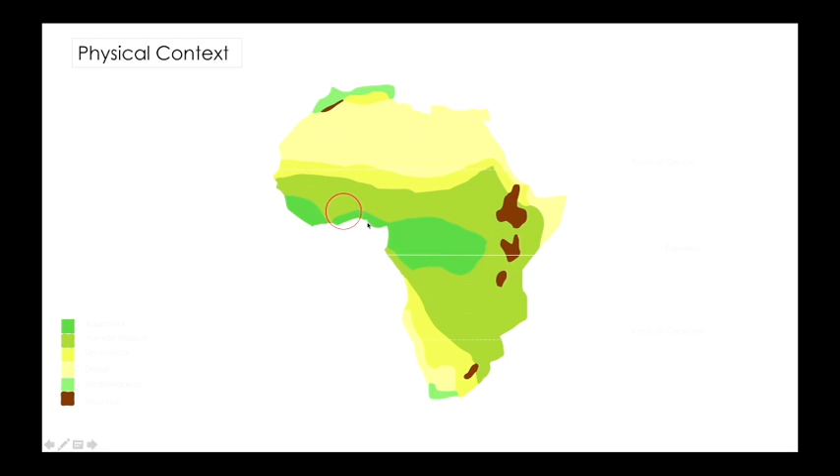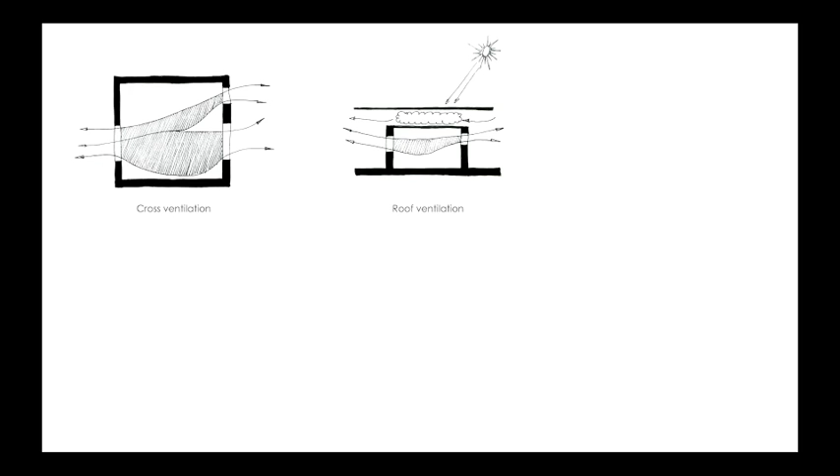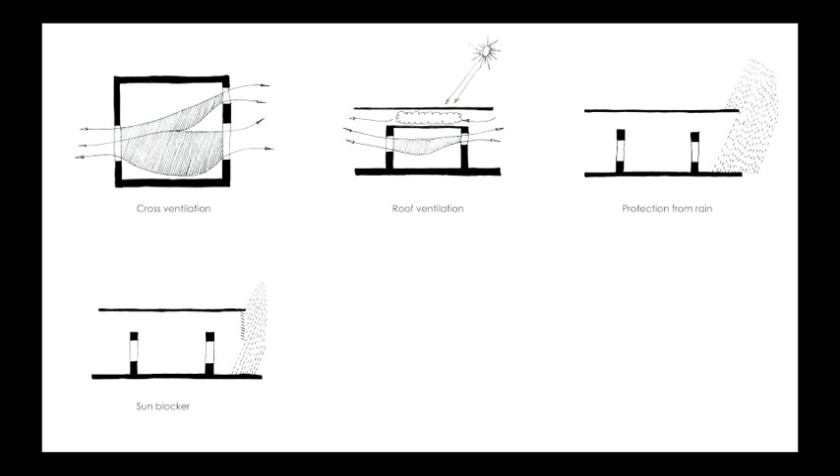And of course, in tropical Africa, we have to rely on certain techniques in order to create good architecture. The first one being cross-ventilation. Second one being the fact that using ventilated roofs can allow us to achieve nice temperatures inside. Another one is how do we protect ourselves from the heavy rains and from the sun. Another one is how do we block the sun from getting in? How do we avoid overheating from sun on glass?

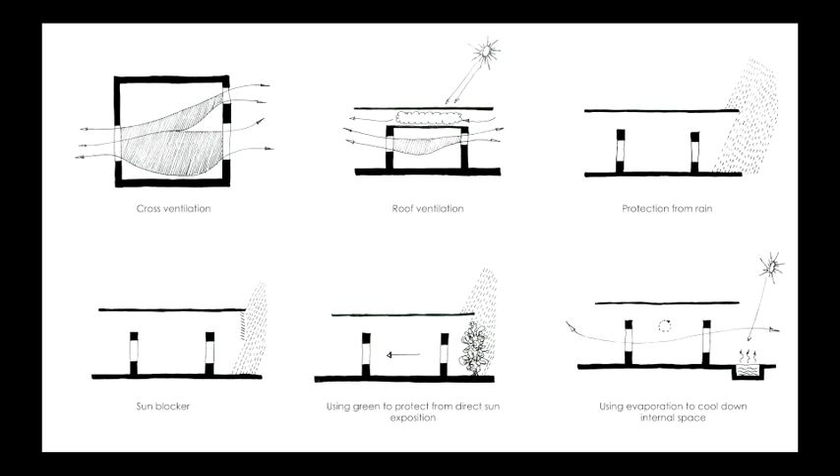Another is also how to use vegetation and greenery to protect ourselves and achieve interesting temperatures inside. And another one is how do we use the sun and bodies of water with evaporation to achieve relatively comfortable temperatures inside. And to demonstrate what I just talked about, I'm going to take you through a house that we recently designed.

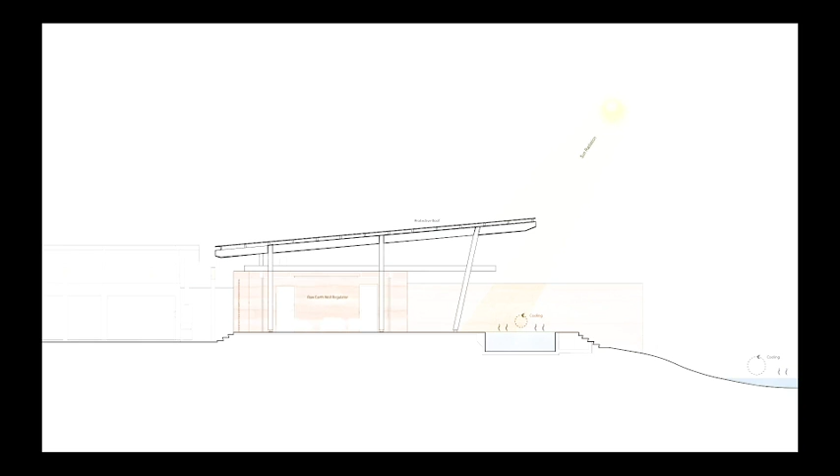Very simple and usual principles in our architecture. We use a one-slope roof to take the water down. We tend to cross-ventilate the roofs so we can achieve a certain comfortable temperature inside. But we also protect ourselves from the sun with big overhangs and use pools to cool down the space, and also use rammed earth in many cases to insulate the internal spaces. And of course, cross-ventilation is something that we use extensively because it's very easy to achieve and creates really comfortable temperatures inside spaces.

So this is the house I'm actually talking about. And you can actually see all these systems, and I think it's much more about systems than about materials. How do they work? And those are systems that have just been borrowed from our traditional architecture.

And of course, in the south, in regions like Abidjan and Accra, you probably have noticed that the traditional architecture is made of what we call bamboo raffia, which is those sticks that are not sealed to the wind. So we achieve cross-ventilation all the time, and we avoid accumulating humidity inside the spaces, which is not the case with modern buildings that are sealed. After 2 or 3 days of a closed room, you come back and you can smell the humidity. So those systems have been for us a guideline in order to design contemporary architecture.

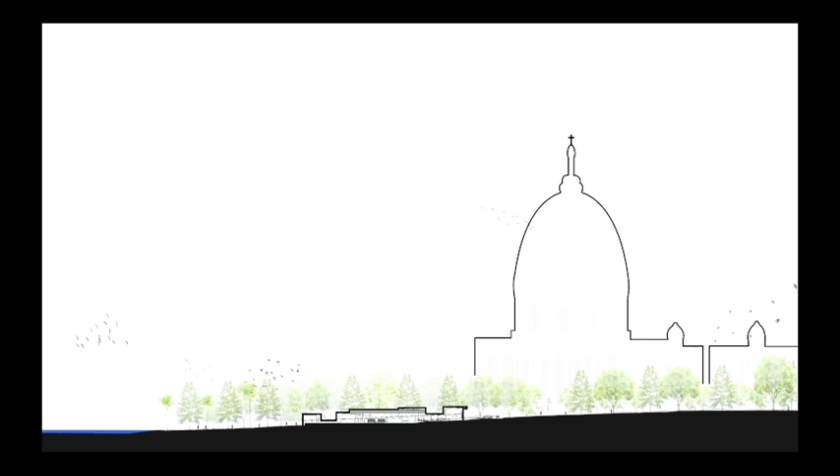And here you can see the scale of the basilica, and this is our intervention for the spirituality center, where you can see all the three scales and trees that are supposed to swallow us later on. So when they approached us, they did not give us a specific site to intervene on, and we decided that maybe the best place to house the center would be in the forest in the back.

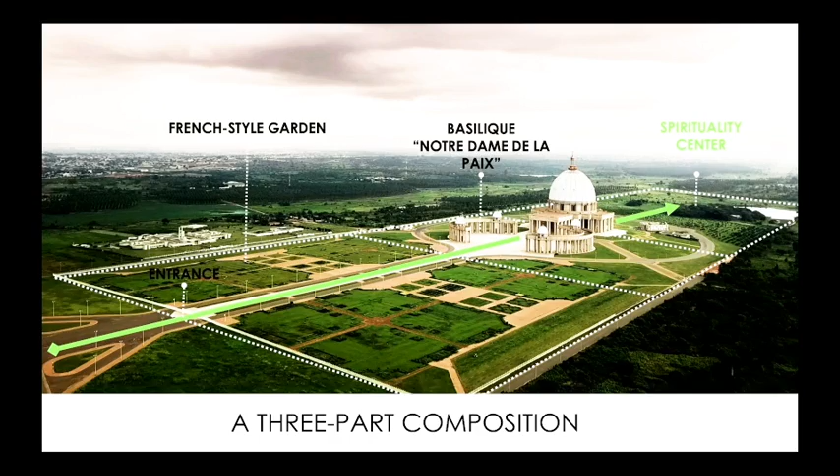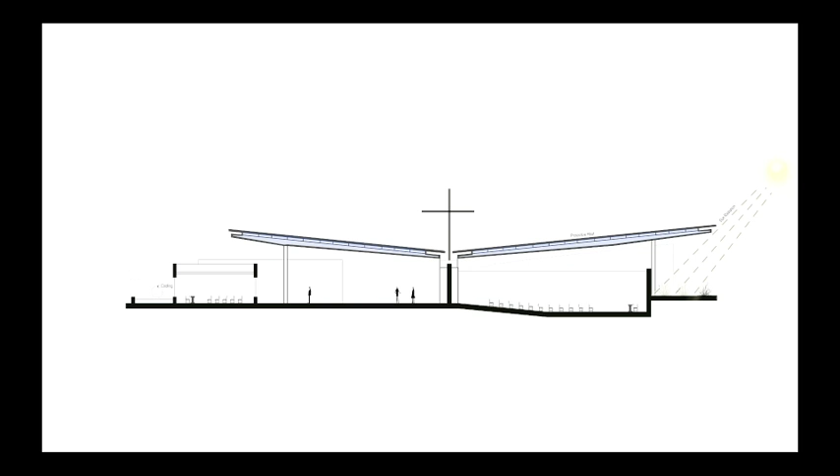And here you can see the similar process as with the other building: the body of water, the sun, the big overhangs, the rammed earth walls and the cross ventilation, roof ventilation, all of that to blend into the architecture of the environment. Here you can see a plan of the entire center.

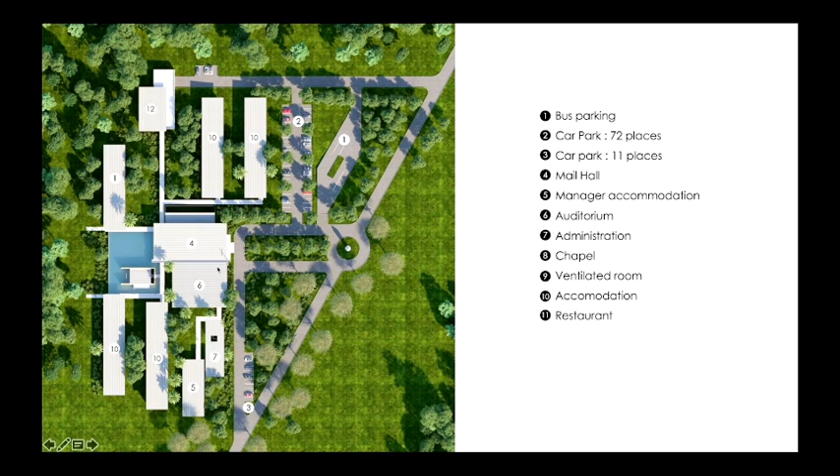Here is the road that comes from the basilica, and we are sort of disappearing within the existing body of trees, with the main space here connecting all the different other spaces, which are made of rooms to be occupied by people who come and retreat. Here, number 8 is a chapel, and the others are support activities like administration and restaurant and what have you. The composition of the layout is through this main space.

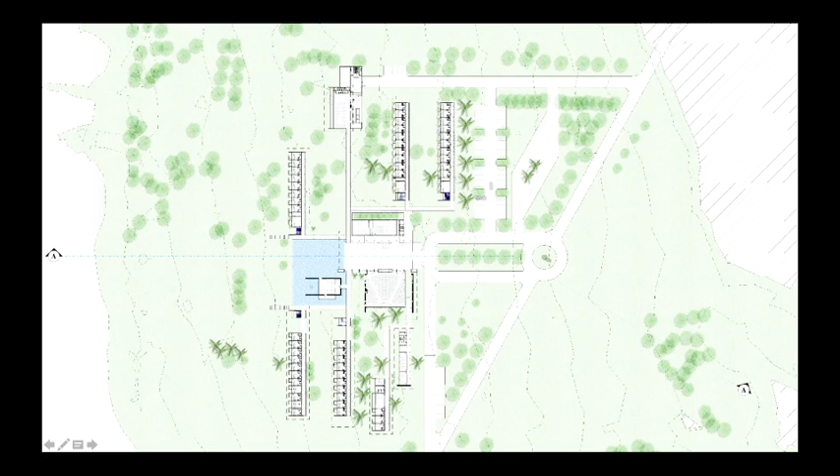As you enter here, this is the main space that distributes all the other spaces: the rooms mainly, the amphitheater, the administration, and the chapel here. It was important for us to create a body of water here, not only for climate effects, but also because in this axis we have the little forest connecting to another body of water. So it was pretty nice to have this water as we walk in.

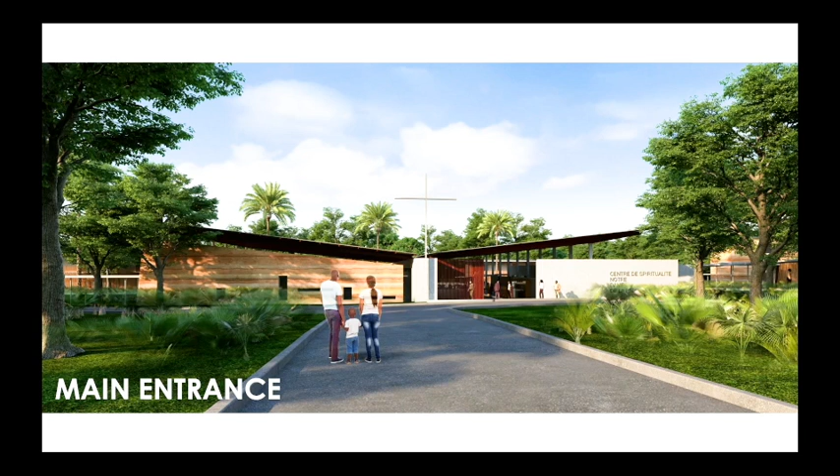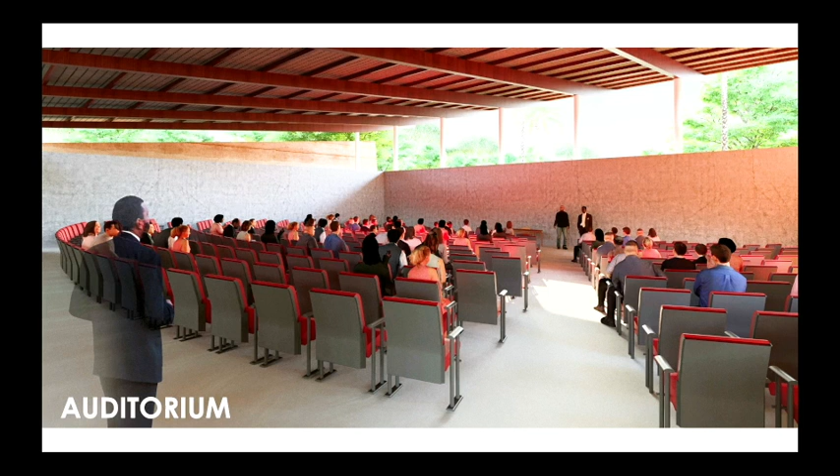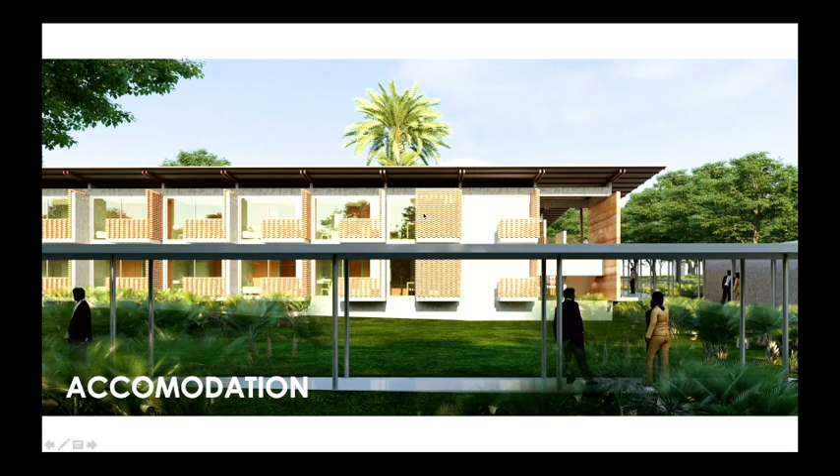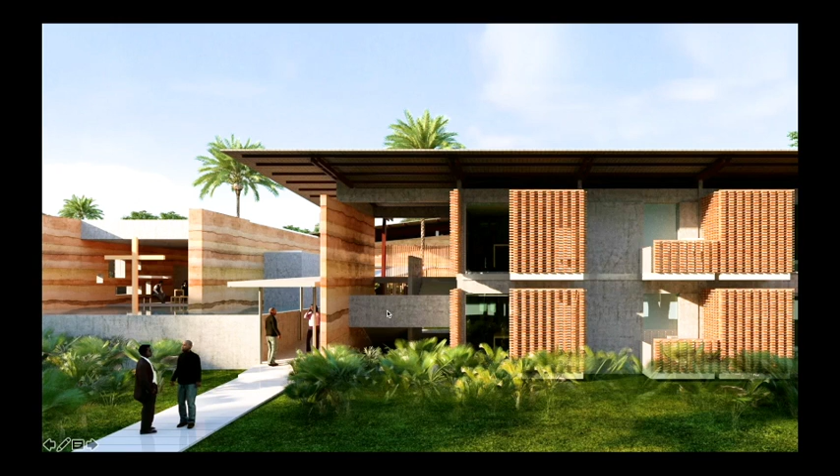Here are some of the accommodation units. You can see that the balconies have different sizes. The taller walls are supposed to act as places of retreat when you want to pray, and the others are for more normal types of usage. You can see an elevation, and here also you can see the stair and the rammed earth and bricks that we're using as vocabulary.

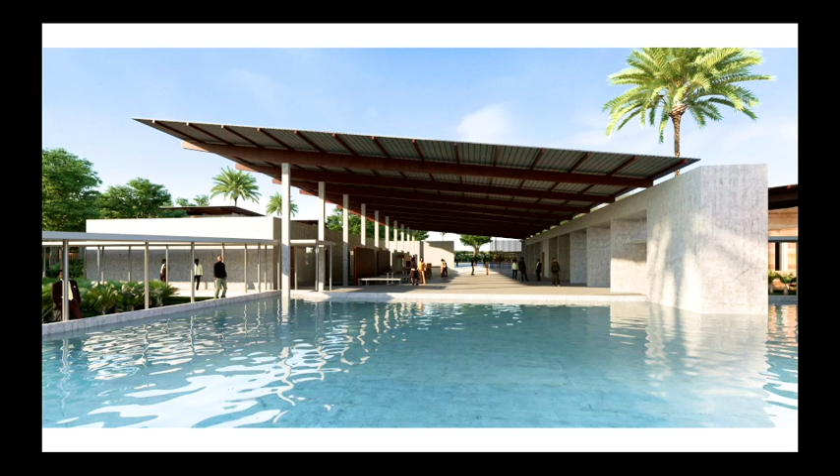It was important for us to create a lot of green space in between, because they do really create a microclimate, and in places like ours it's quite important. This is a view of the main room connecting all the others, which is basically a shed just to provide shade and create cross ventilation. And this is an image of the chapel just on the body of water and looking out towards the forest.

The next project is one that we got an award for at the World Architecture Festival, which is a gymnasium in Abidjan. It's the French school's gymnasium. And what's really particular about this building is we try to think of it as something that originates at least from our climate. And of course, from the program, we had to deal with different elements. And what we chose to do is to put all the hard stuff on the ground, the place where we don't need as much span.

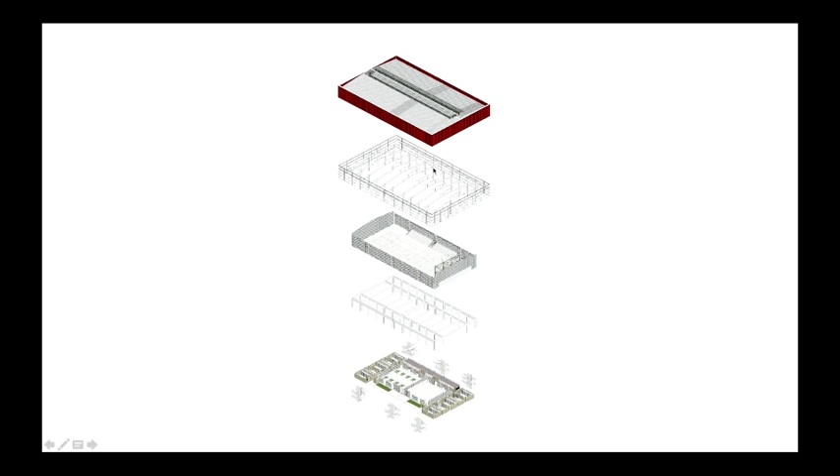On top of that, we have concrete structure, metallic structure, big overhangs to house the big room, and this is like a hat that sort of protects the building from the elements. Here you can see a section of the building and how it actually works. We have a 6-meter overhang on the periphery of the building just to avoid the elements to get in, specifically the rain, the sun. And also, we do allow for the wind to go across.

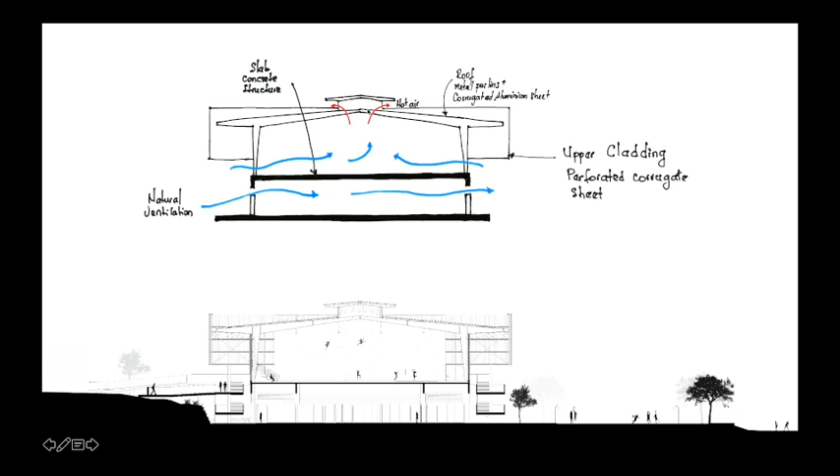In this concrete structure below, we have openings above so the wind can freely go in. And on the structure that is on top, we are using perforated metal sheeting to have total transparency on the site around. So this gives you an interesting quality of space. When you walk in, you can actually see the surrounding and not realize that actually you do have this overhang and you do have this big hat that protects the building from the elements.

Inside, the spaces are pretty raw, really, pebble on the ground and still perforated sheeting to avoid the balls to come out of the spaces. And the rest is relatively bare. The metal structure is exposed, the drains as well, because we had to make it relatively cheap. And this is an image from the outside, where from the outside you can actually read the red hat, but from the inside it totally disappears because of the perforation effect.

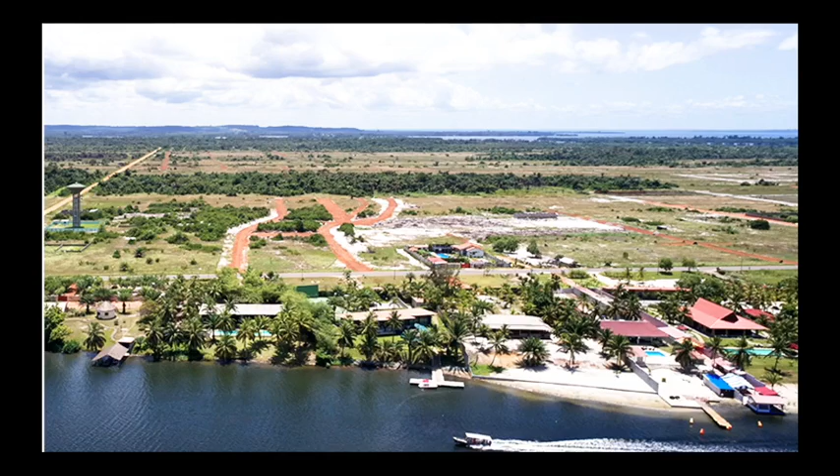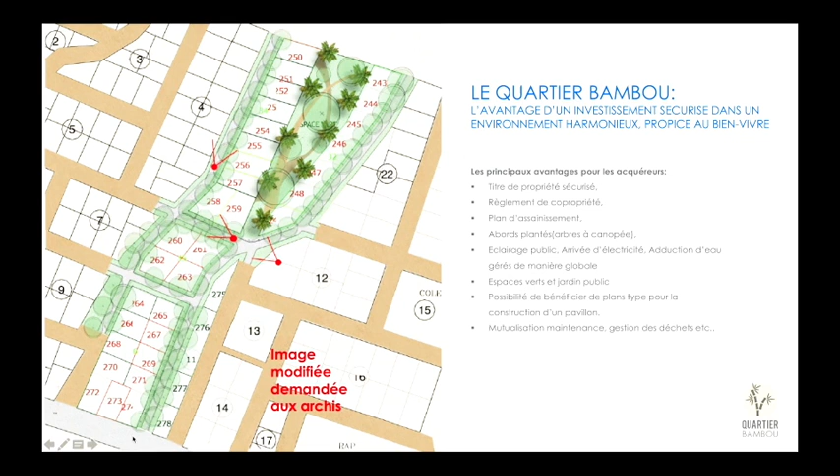And going there quite often, I pretty much identified who was the owner of this land in the back, and approached him and told him, well, I don't have the resources to buy all your land, but what I can do is sell your land for you. So I could identify who would buy this land and then sort of rework on the land, and this is how we could achieve to have like a big garden here, and we redesigned the layout, and we sold to people we knew, mainly friends,

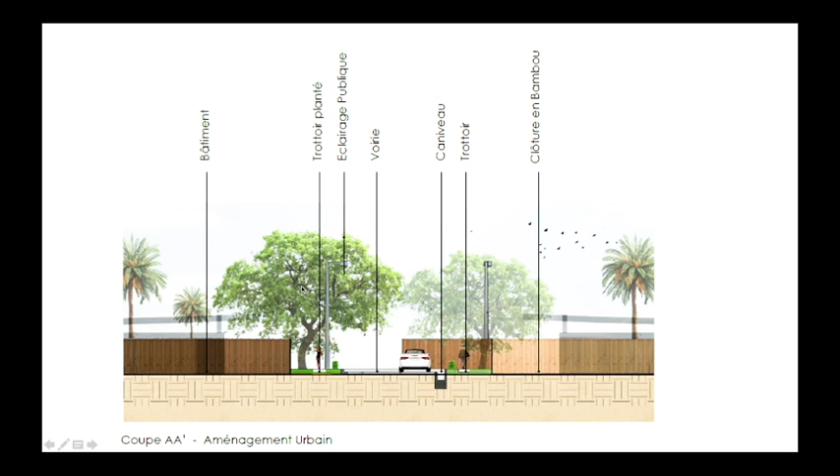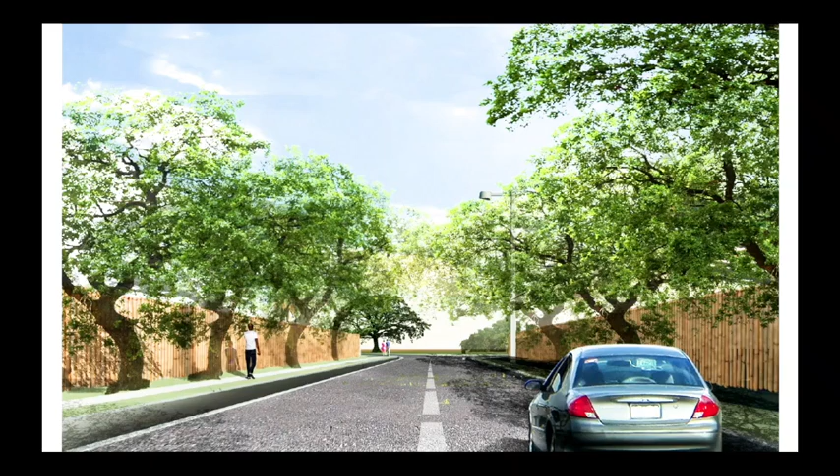with certain guidelines. We told them, well, first thing, this is how it's going to happen. The fence is all going to be bamboo, and you're going to have to pay for the urbanism. You're going to have to plant big trees. We can negotiate to have lighting from the municipality, and we're offering you a certain model of house as a plan that you can adapt according to your use. And this is actually how we pretty easily sold all the plots, with also renderings to make it attractive.

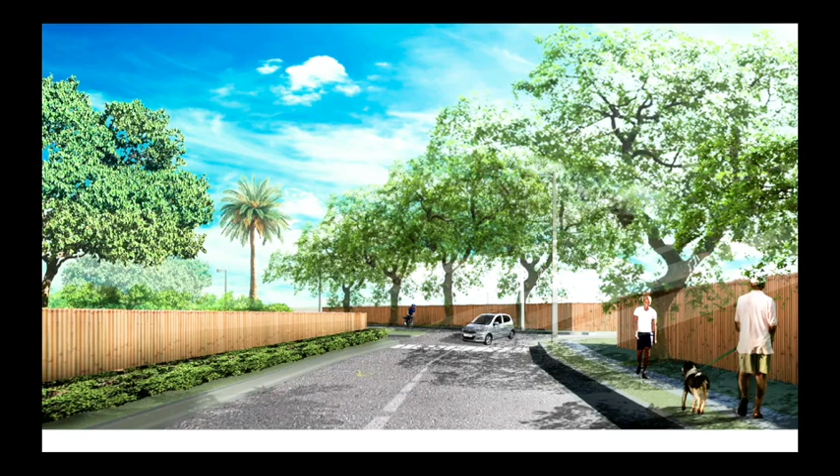And glad that after a few years now, this is something we started about 6 years ago, out of almost 20-something houses, we finally completed 4. Of course, when you're doing architecture in that type of environment, it's probably going to be a secondary home. So it has to be relatively inexpensive.

And as you can see here, this is a typology that was developed to be very easy to build. Only the columns are concrete, and the rest is wooden roof with local material to cover the structure. And all the rooms are cross-ventilated, so you don't have hallways or places that are completely shut off from the terrace. And you have 1 bedroom, 2 bedroom living space with a kitchen inside. And of course the pool being a key element in that type of environment.

The bathrooms are very basic, no doors, pretty much open. The floors are cement floors, nothing fancy. And the idea of those places is they have to be pretty flexible and invite a different type of living. And social engineering has to go further, and of course, learning from that environment that we pretty much use as our laboratory, we were able to maybe think a little bigger. And this is our first big, I would say, social engineering project, which is Résidence Chocolat.

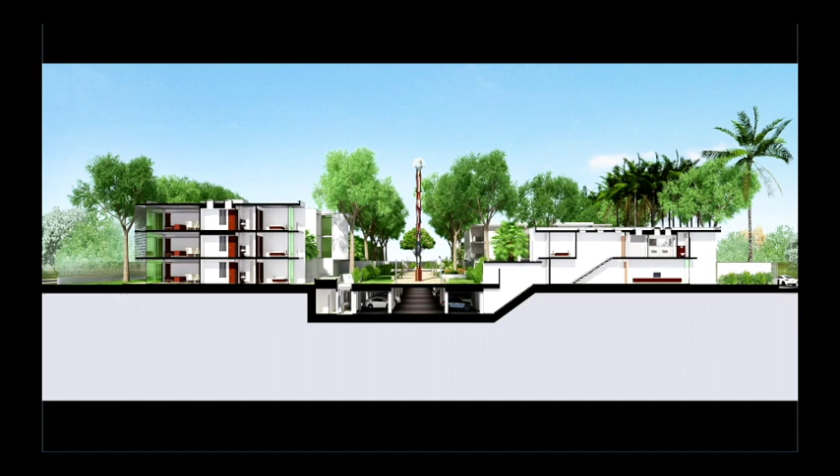We, at some point, realized that we had to think differently about the way we live in cities. And in order to create new typologies, instead of waiting for a client to come, we decided to become developers. And that has really changed the game in our practice, because suddenly we could experiment on some of our projects with new typologies and new ways of living, which people would be reluctant to subscribe to initially. So this place was initially designed in a neighborhood of Abidjan where you usually have one house on 2,000 square meters. And of course, with the way our cities are developing, we cannot sustain that model.

And we decided to densify in the same area, actually dealing with the same kind of clients, people who usually have big houses. The main idea here is to take all the cars down to an underground parking space and create public space above that people can use and engage in while being linked to the parking space from their habitat. One typology is a house and the other is an apartment building.

Of course, we thought that it was interesting to do that from a sustainability point of view, but it also became a pretext to reshape the way people live. People who usually live on one plot are not used to dealing with 32 units altogether. And this is actually what made them interested in this project, because all of a sudden they were not alone on their plot and they could share a certain number of amenities, including the gardening,

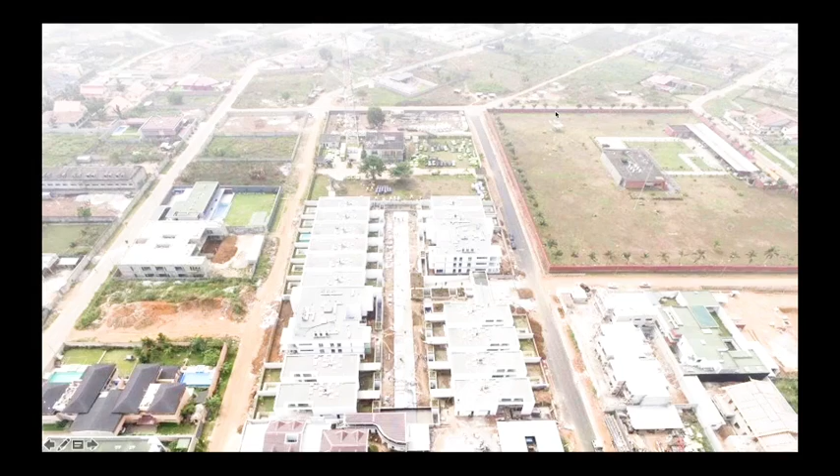the repainting of the house every 5 years, including a generator that they share as a community, really. This is what it has become now, a community. And they realize also that when you divide all of this by 32, it's a lot cheaper than actually being on a big plot with your own house. And here you can see how dense it is compared to the other plots in the neighborhood. And it's funny, ever since we finished this project, which was about 4 or 5 years ago, a lot of other plots have densified in the neighborhood.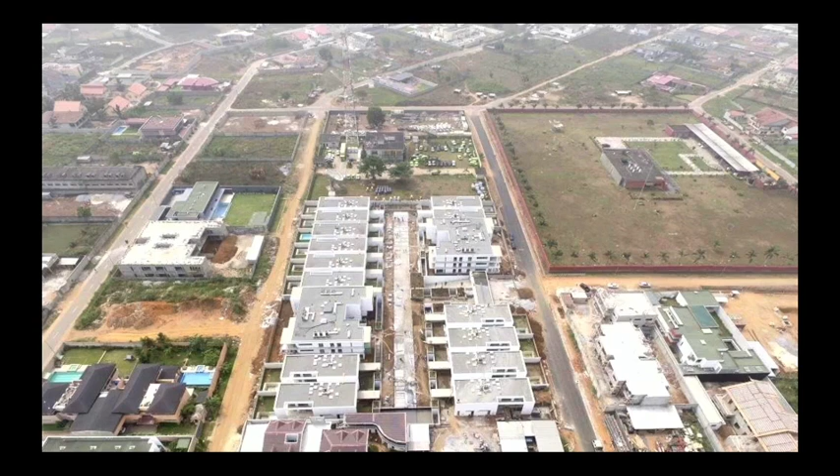That's an image of the public space we've created, a view of one of the apartment buildings. And here as well, it was important for us to use a lot of green to create shades and also to create a different type of atmosphere. That's a view of one of the houses. That's the entry to the apartment building.

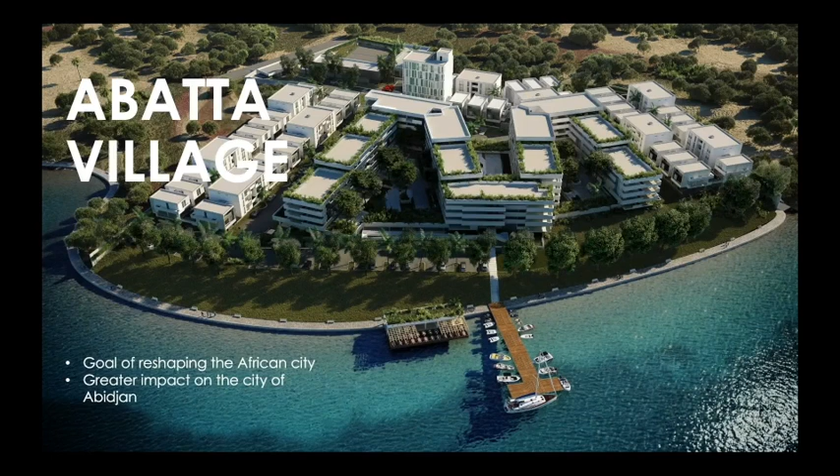And having been quite successful with this first project, we thought it was actually important to move to a different scale, because 32 units in a city like Abidjan is just like a drop in the water. And we thought, now having gained sort of experience from this first project, we could move on to something bigger. And we just broke ground on this project that is 226 units, which is pretty much in a village, not too far from Abidjan, about 20 minutes from the center of Abidjan.

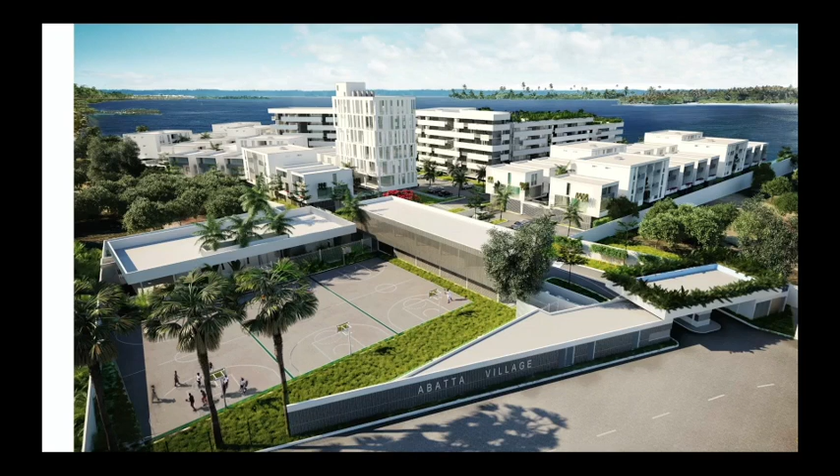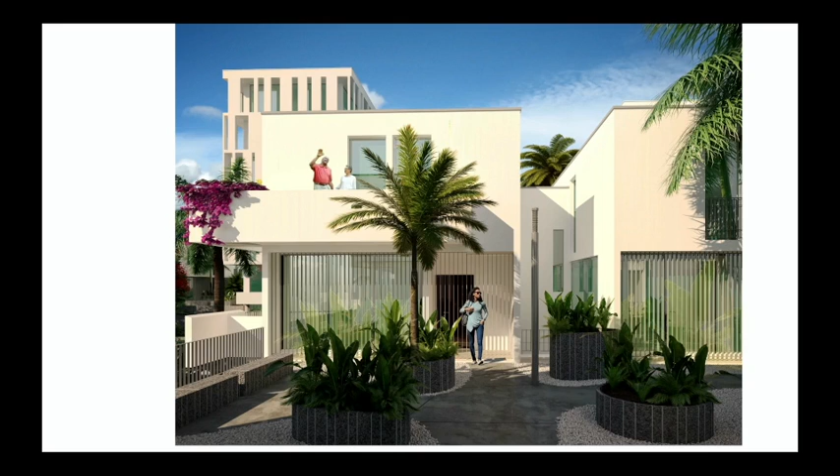And of course, when you're dealing with 226 units, you can do much more in terms of what you can provide to the neighborhood. So a sports venue, for instance, an office building. We also have a promenade on the lagoon that benefits all the residents. And we have also created semi-private spaces for the inhabitants to have different layers of privacy in terms of the way they live and in terms of the way they want to engage in community.

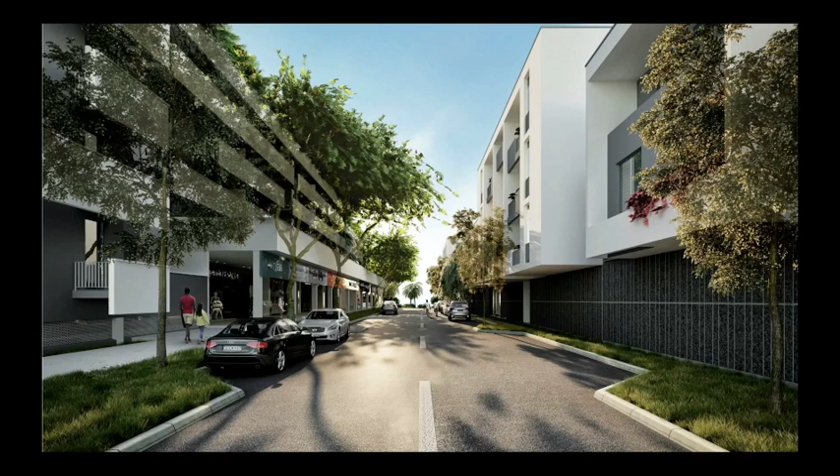Here you can see some of the retail spaces, and the ambition is to create an interesting microcosm. We're aiming to include a lot of diversity, not only in the typologies of building, but also dealing with small apartments allows us to bring in different types of population, from younger people to people who are definitely more established to people who are retired. And of course, the idea is that such an environment becomes a solution to their living status. Similar type of parking space.

And this just broke ground and is currently under construction, which leads me to another project which we think of as our retirement project. This is a village not too far from Abidjan, in the network of the lagoon that joins a number of villages and cities in Côte d'Ivoire. And what we're trying to do here is start from an existing village that is on the water.

And because of the position of this village and the network of roads that is growing fast, we fear that if it's not really taken care of, it may become like some of the neighborhoods we have in the city that are not really controlled and are just evolving as the roads actually go. And we tend to think that the roads tend to bring chaos. And in this environment, what we're trying to do is create a sound environment out of all of this.

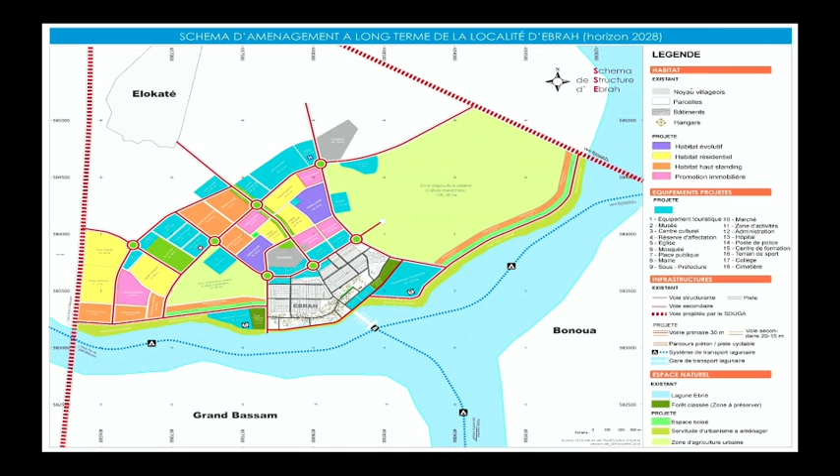Which I personally think is usually the problem in a lot of African cities, the fact that they spread and the administration is pretty much immaterial, whereas when you go to villages, everybody knows the chief. So the tools of power are much easier to implement. When you come to a city, nobody knows their mayor.

So this is something that is really dear to us, and of course it takes a long time. We're still at the very early stages. We've finally had the agreement of the landowners, meaning the villagers, to subscribe to the project, but now we have to go through a certain number of stages before it becomes something real, and this is why we think that it's going to be a project that's going to last for at least 15, 20 years.

So I used to be very critical of working with African states in general. I still am, and I think it really depends on the countries, but we recently had the opportunity to work with the state of Benin on multiple projects, including one that I think is really major.

It is 20,000 units of low-income habitat that we had to develop, and of course, initially, when we look at it and when somebody comes to you with such a project, they usually think of it in terms of habitat and not necessarily in terms of urban planning.

And for us, it was pretty much an opportunity to go beyond what we usually do, which is working on one or few units, and really start thinking about how do we recreate, or how do we create a sound urban environment for African cities.

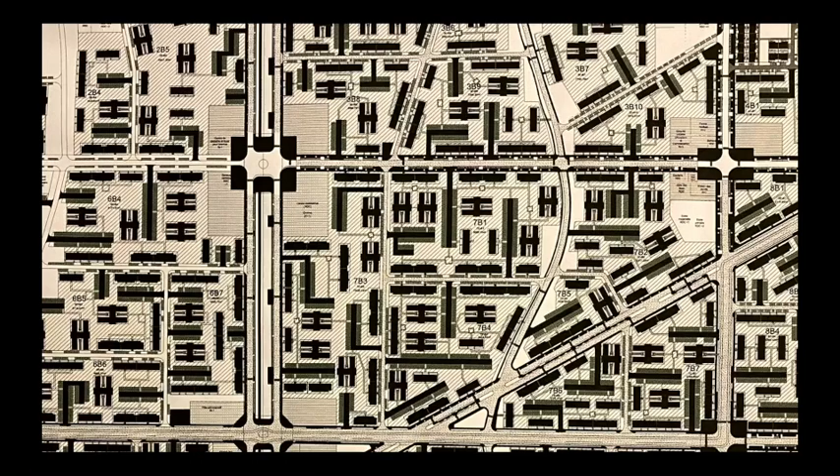And what we quickly found out is that designing the units is actually maybe a very, very small part of what we had to do. It's pretty much designing the systems that will make the environment work. So we had to deal with mobility, for instance. We had to deal with the amount of green. We had to deal with parking. We had to deal with what do we do with all the moto taxis that we have in Cotonou.

We had to create lanes specific to motorbikes. We had to think about how do they evolve in the future. Will they become at some point electric? How do we recharge them? I mean, all of those were issues very dear to us when we designed this thing.

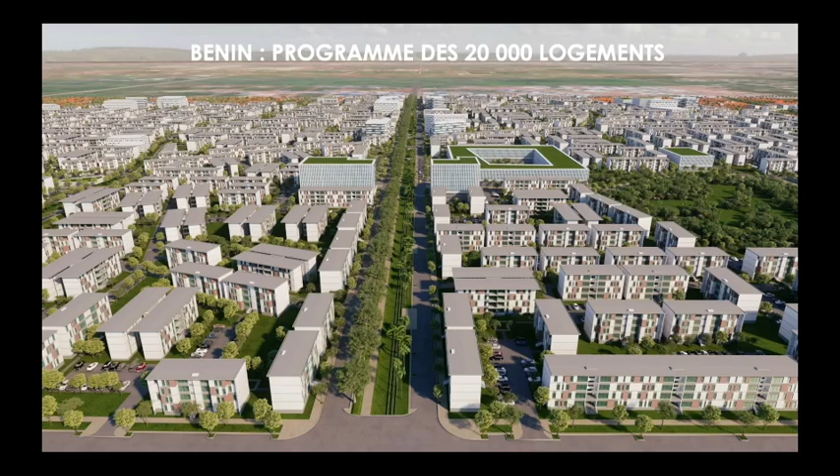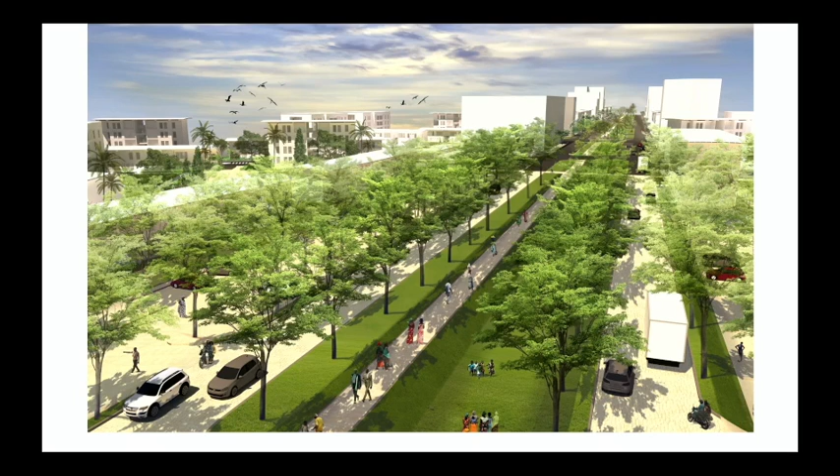And actually, the buildings are very basic, but efficient, all cross-ventilated, so we don't accumulate heat. And the urbanism on the other end is where all the energy went. How do we design specific drainage for our African cities, with low maintenance? How do we incorporate that drainage to public space?

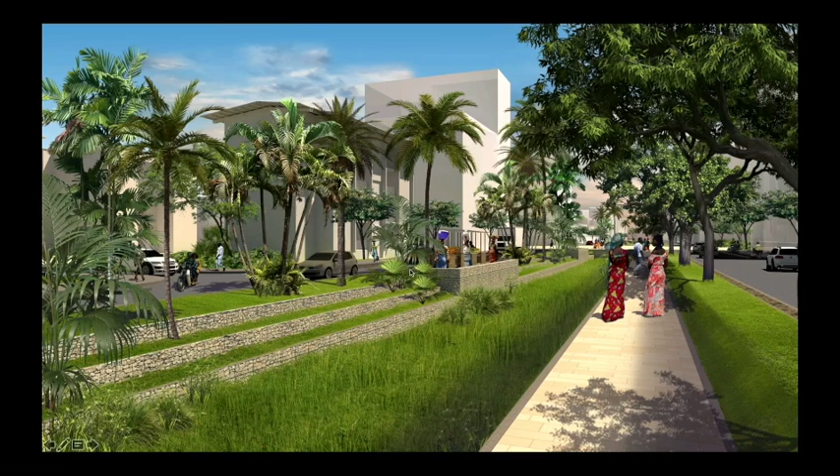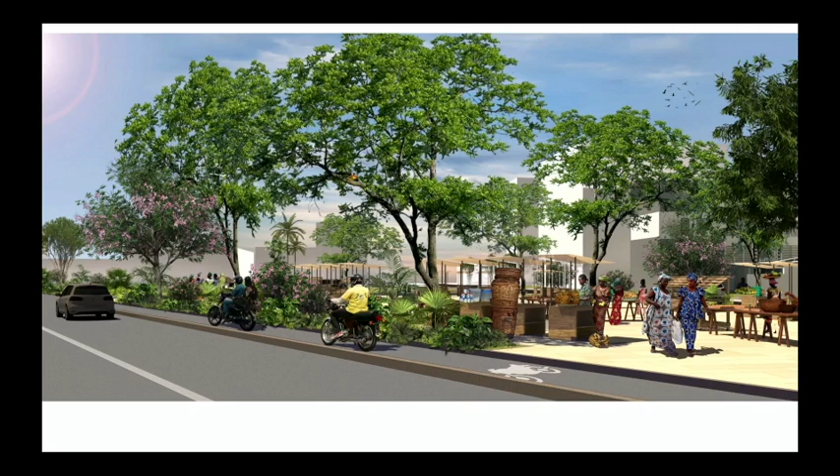How do we create public spaces that are very much in line with what we find in our cities? And how do we learn from the things that we see in our cities to create, or at least foster, a certain way of living in our cities? One thing that was really important to us and that we realized is that the presence of retail in African cities is really, really important. And this is something that we had to go back to the drawing board and re-incorporate.

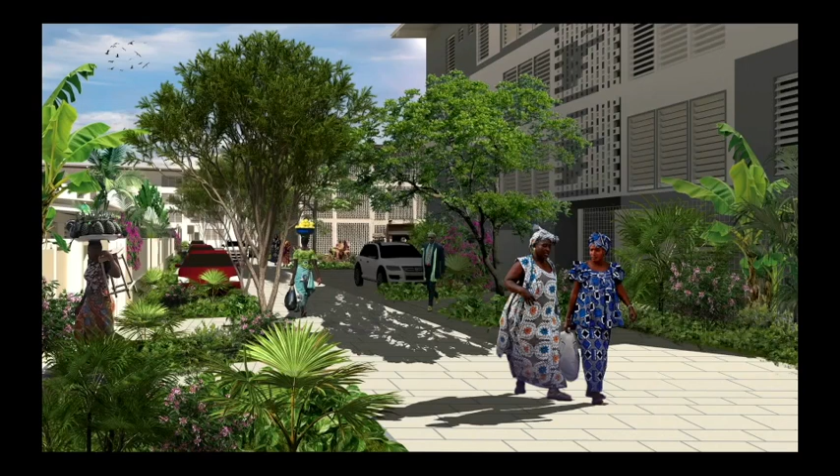This is a project that broke ground. I mean, we've built about 20 units so far. It's also very interesting to see how it goes and how it evolves. It's really important to have a government that has a vision, and in this case, we do have at least an administration that understands what low-income housing is.

The principle of the units is that they're relatively affordable, but only one unit is allowed to be bought by one person. So you cannot buy 10 units. Also, you just pay monthly rent, and after 17 years, you can become the owner.

And one thing that was also very important in such a project is the administration. How do you make sure that after you leave, the place still is maintained? How do people pay for their fees every month? And of course, we found ways, and this is what is really interesting when you're working at the level of the state.

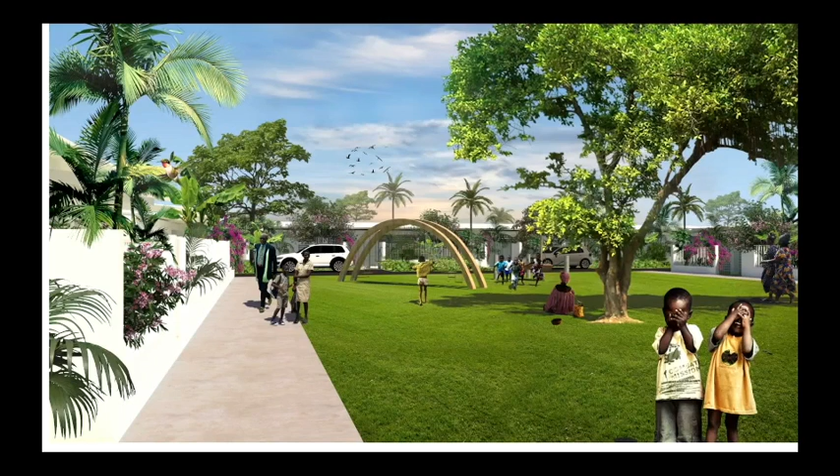We found ways to have that be on their electrical bill, so they don't have to necessarily pay it. It's directly paid from the bill. And you can see here images of what the environment looks like.

And now I would like to just talk a little bit about the future. Of course, I recently realized that I'm not the future anymore. And it was very much important for me to find out what was in the head of younger architects and what they imagined architecture should be. And they quickly told me it's not about architecture, it's about urbanism.

And it's about what we do with our cities, it's about how we deploy them, it's about scale, it's about governance, it's about sustainability, and we have to totally rethink the whole process. They tend to think that whatever we're doing right now is, of course, doomed from the beginning because we do not have the right philosophical ingredients to start with.

So working with them was really a blessing, because they came up with this little film to pretty much illustrate what they think urbanism and architecture should be.